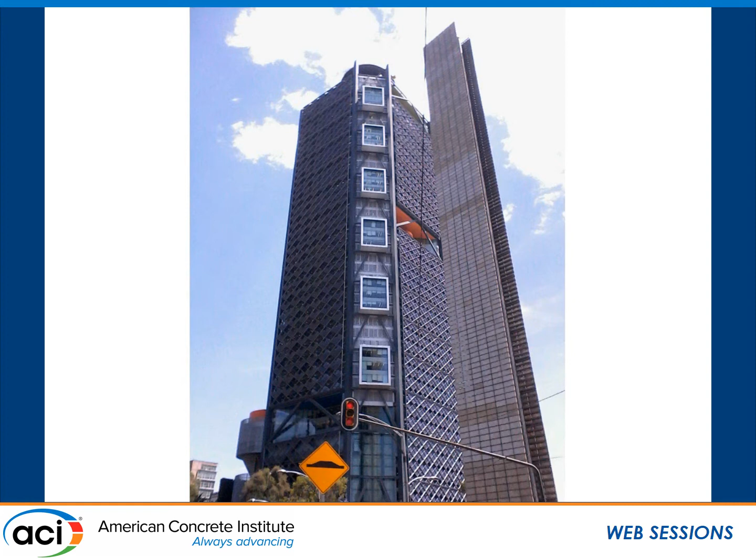in this building. This is the photograph of one of the tallest buildings in Mexico City. This belongs to a bank, BBVA Bank. It's a Spanish owner that actually bought the largest bank in Mexico, and I used to be their consultant. They used to have a headquarters of only 6 stories, and suddenly it was a great idea for them to put up a 50-story building.

When this happened, and I was the peer reviewer for this building, the owner came to me and said, Roberto, what should I do when there is an earthquake? And I didn't know if I should laugh at his question or be serious. I said, well, do you know how to pray? Because there is no way to evacuate this building. So he said, well, what do I have to do then? And I said, well, that's very simple.

Why don't we instrument the building? We know that the chances of a collapse are very, very small, because we did the peer review, we at least had the feeling of that building. But we will not know if there is damage until we check it or we instrument it. And they're Spanish guys who hadn't experienced an earthquake before, so it was very easy to convince them to instrument it. So he said, well, I will do that. So what do I have to do?

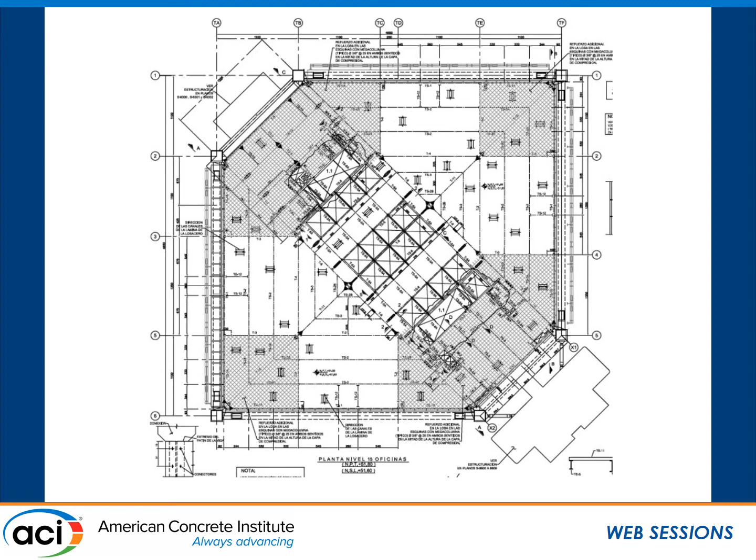So all the hinges will form, well, it's designed so that all the hinges will form in this part that we call fuses. And it was funny, after the earthquake, some of the guys in Spain asked, how many hinges were formed? I said, how many hinges? Yes, you have to look carefully at the hinges. I said, I don't think that any of them formed.

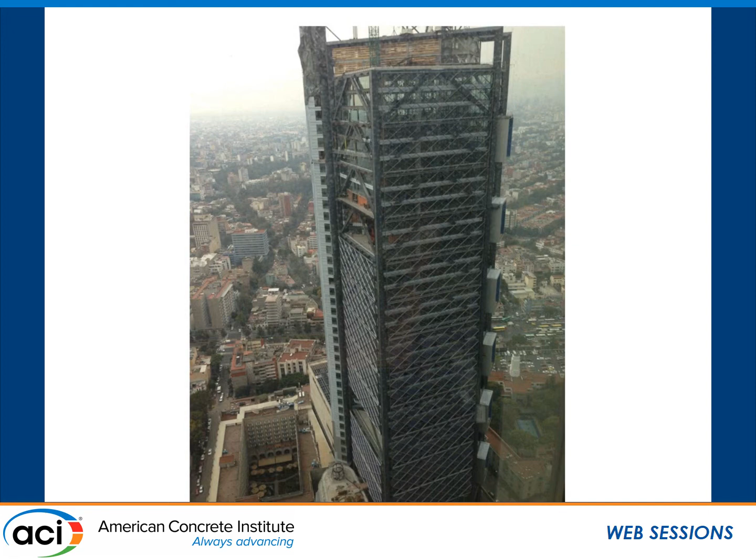So I went to the building after about 3 days because they wanted me to check right away, but I had the information almost right away. Actually, on September 7, in the first earthquake, we measured, and in less than 10 minutes we got the information: the accelerations, the maximum acceleration at each point, the Fourier analysis, and also the periods of the building, and we saw that there was no damage at all.

So the instruments were located at the basement, at the ground level. Another was at level 23, then 34, 35, and 3 at the top to see the torsional and the translational mode.

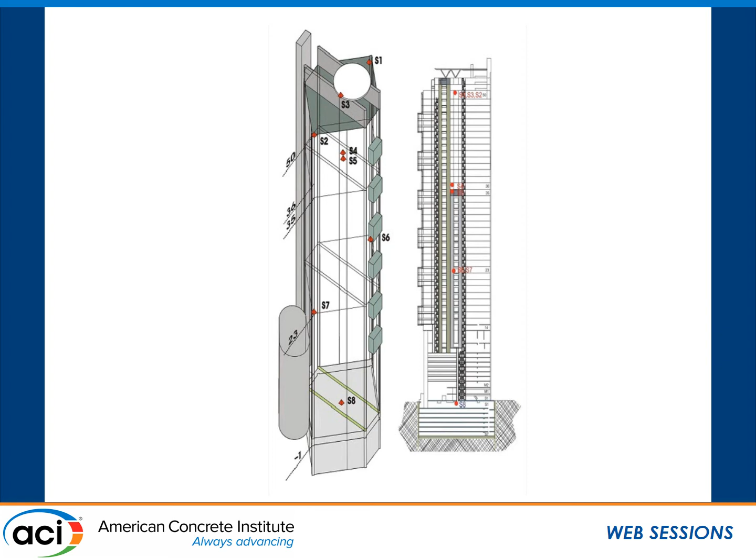So the model, I will say, this is what we call the design earthquake, the design spectra, the design acceleration that we use for the record. And you will see here the formation of the joints, but this was not what it experienced. It was saying, this will be the design. If there is a design earthquake, it will form the hinges that I'm going to show you, but all of them are in the operational portion, so there was no permanent displacement or damage here.

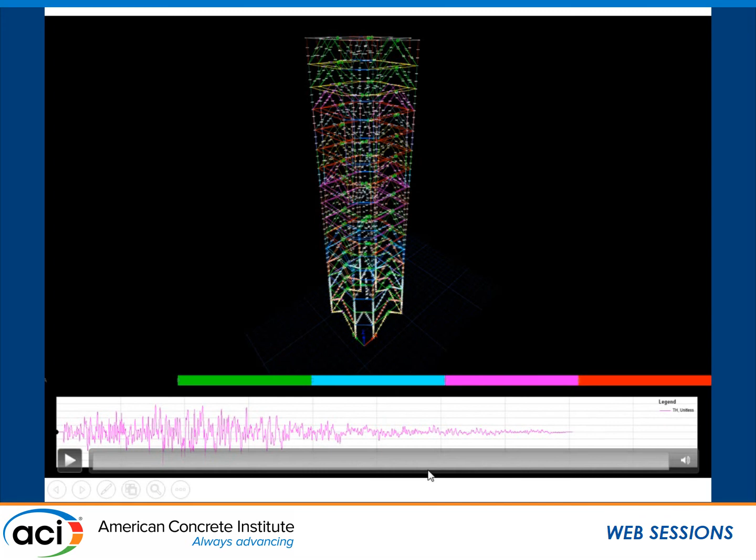And let me run this if I can. Oh boy. Okay. So there are no hinges, and then suddenly almost all are formed.

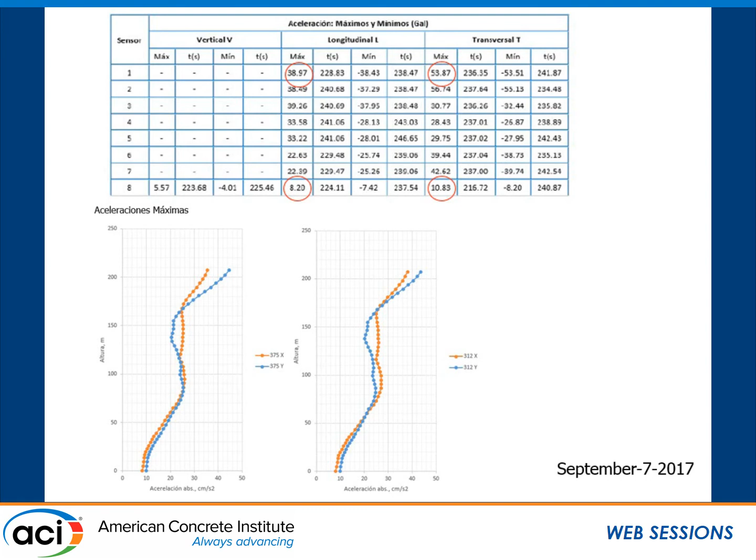So now, in the first earthquake that occurred on September 7, as Sergio described, for Mexico City it was a very minor earthquake. We basically felt it, very, very minor. Sensor number 8 is at the ground level, and you can see the maximum acceleration in the order of 10 gals, more or less. If we see the displacement, the total displacement was less than 5 inches, in the order of 5 inches. If you see the drifts, the maximum was 0.3086. So it's very, very small.

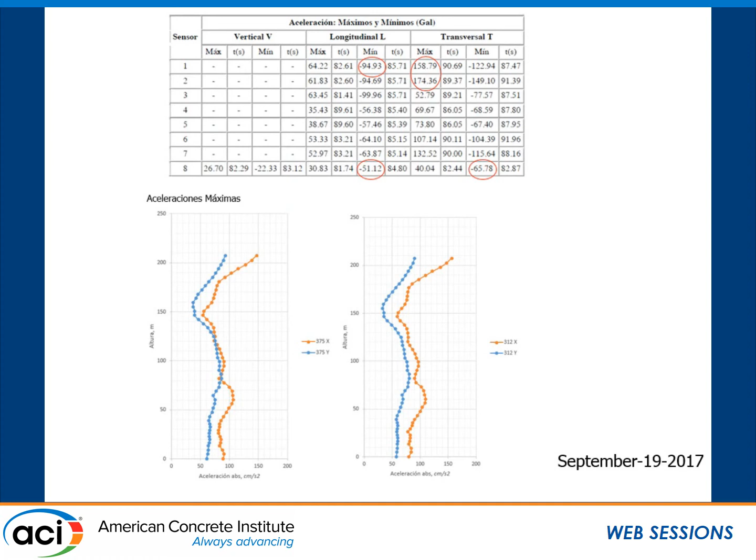Now, for September 19, you could see that it was almost 5 or 6 times the acceleration. And the displacement was, I will say, less than 8 inches. Which was a little surprise, the big difference in acceleration, at least to me. For those of you who are very familiar it will be easy to explain, but I expected more difference in the total displacement.

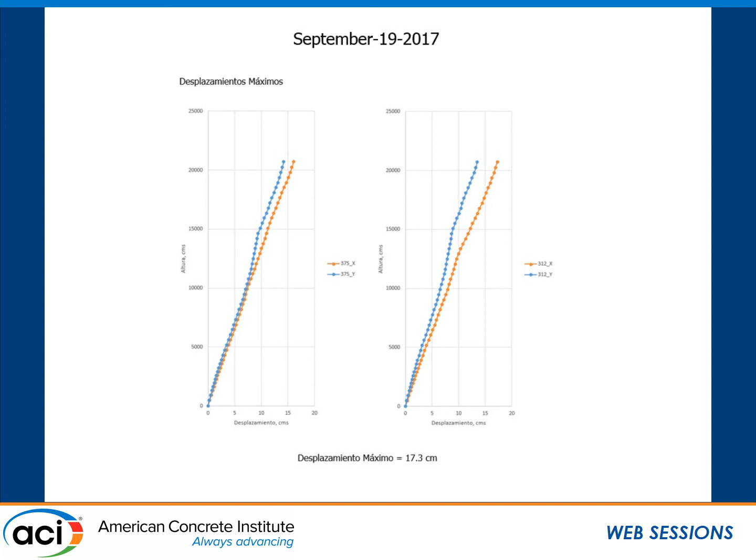The problem that we had in Mexico is that after this September 19 earthquake, communication was lost, but not as bad as in Puerto Rico. We had probably 15 to 20 minutes of communication lost, so we recovered very, very quickly in that respect.

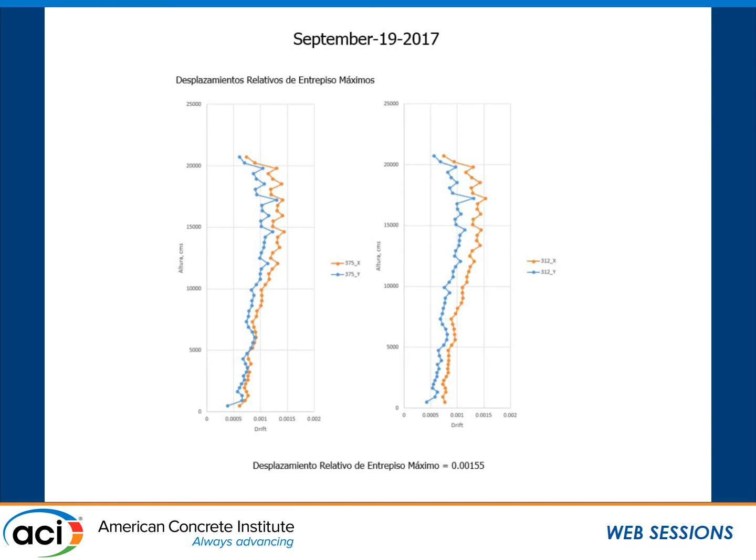And with that experience, the client was so happy, and that's good news for ACI, because now we are going to instrument this building, which is a 40-story building, but a 100% concrete building. So we hope that within about 6 months we will be able to instrument it and prepare the analytical model so that we will be prepared.

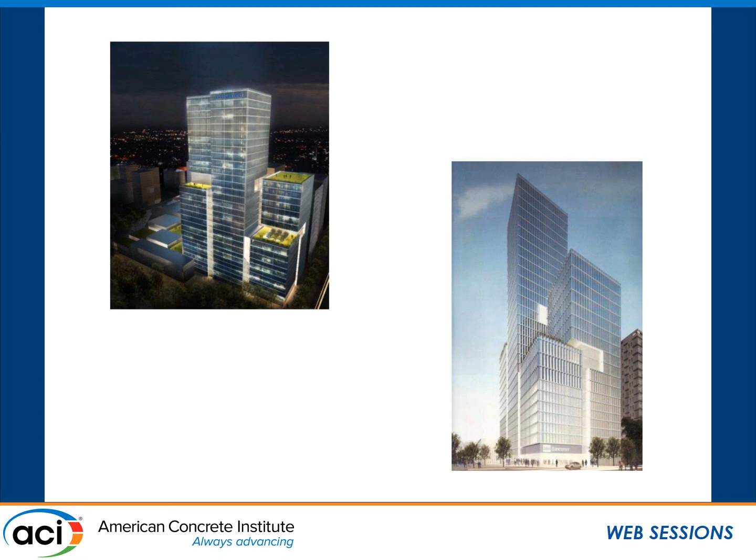And I hope that Sergio will be wrong, but yes, we are expecting the big one, because this was not the big one, even though we had some damage. We really expect one from the coast, from Guerrero, what we call Brecha de Guerrero, or from the Guerrero fault. And I think that's what we will expect, more acceleration and hopefully not as many problems as we had now. So with that, I want to thank you.